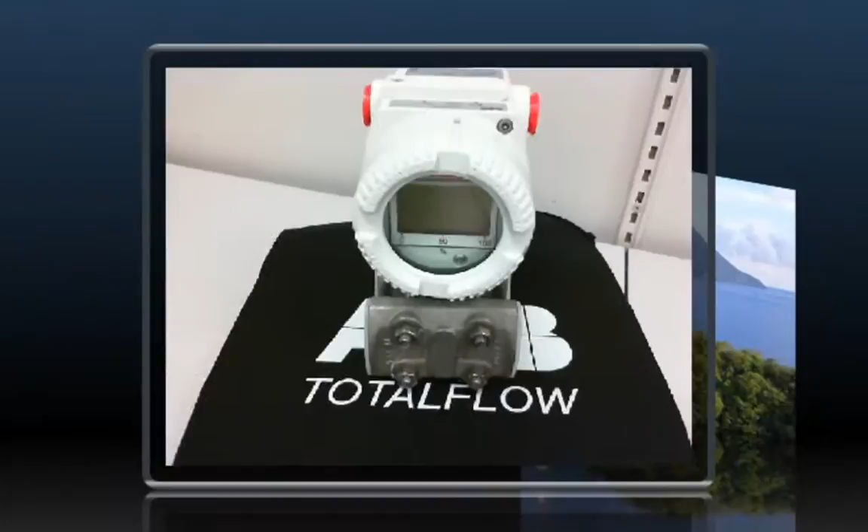The XMV multivariable transmitter is a 2-wire RS-485 Modbus device. It requires less than 12 milliamps to operate and can be powered by a Totalflow G3 and G4 series with 12 volts. The XMV works by measuring static pressure, differential pressure, and process temperature, and then communicating these readings via RS-485 bus to the Totalflow X series device.

Let's take a look at the hardware on the ABB multivariable. On the front you can see we have a display with a cover. We have 2 ports on the side, which we can put our RTD and our wiring. Around the back we have our terminations. Let's unscrew this cover. RTD here and here. Our power and RS-485 bus there.

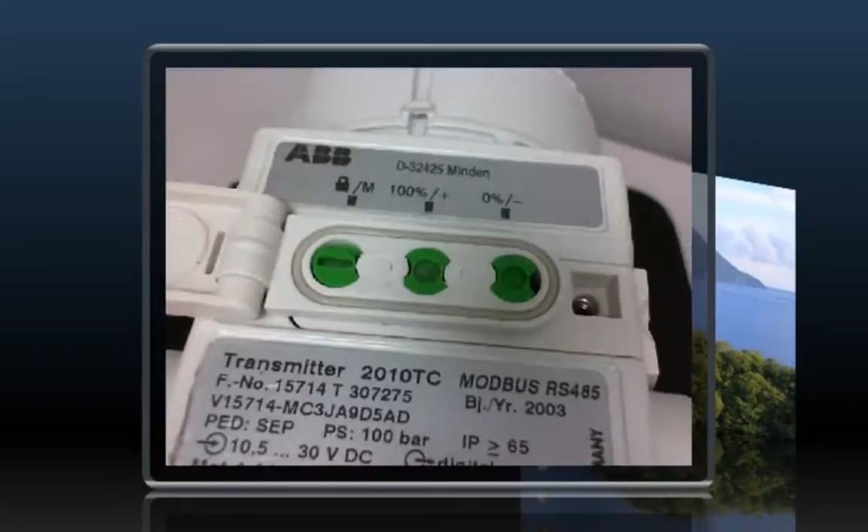On the top of the unit we have our push buttons in which we can set up the unit. As you can see, we have plus and minus, backwards and forwards. We operate the programming just by pressing down, up and down with the screwdriver.

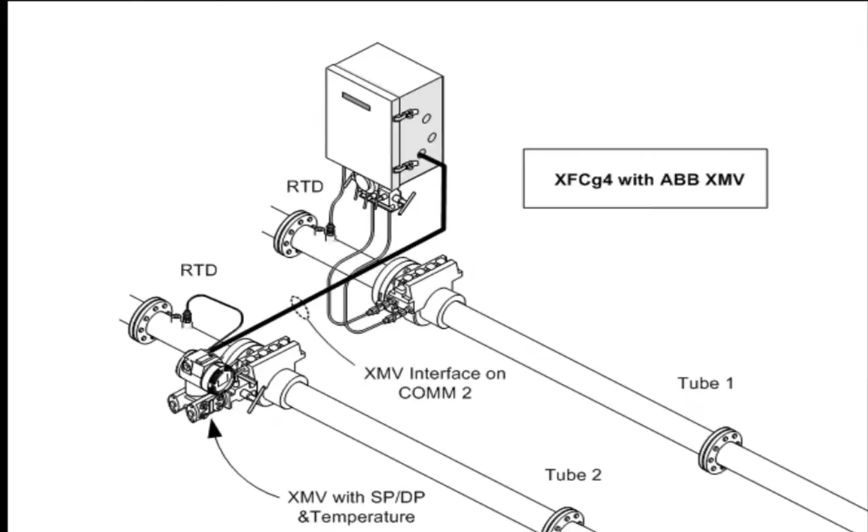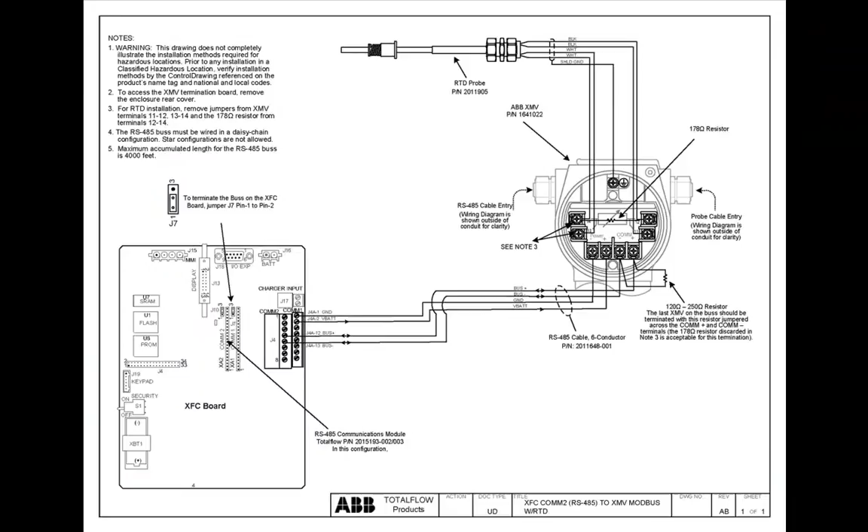Now let's take a look at the wiring between the XMV and the XFC board. As you can see from the wiring diagram, first we'll start with the XFC side. As you can see from the diagram, we have bus plus and minus and power connections. Also notice that we need a COM2 module placed into the COM2 module slot on the board of the XFC.

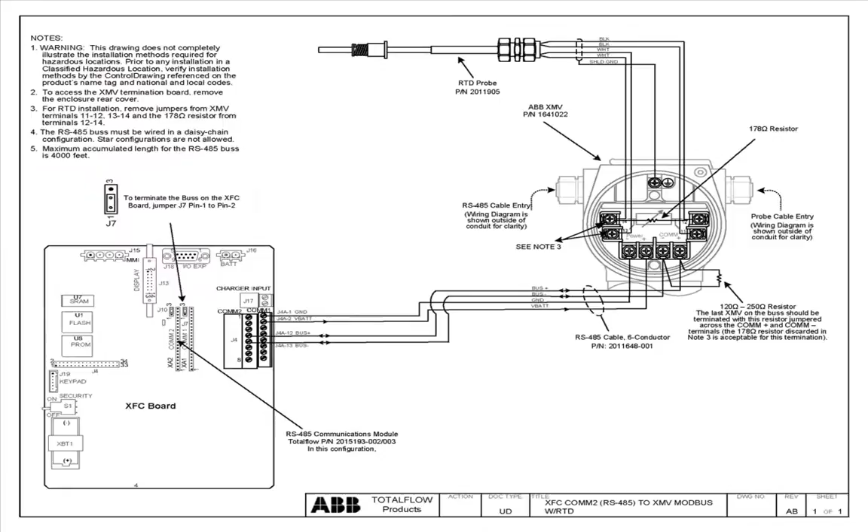Now let's move over to the XMV itself, and notice we have the same connections, bus plus and bus minus, power plus and minus. Also notice from the text that if this is the last XMV in the series of XMVs, if there are multiples, we need to apply this 120 ohm resistor to the last XMV, as the note states.

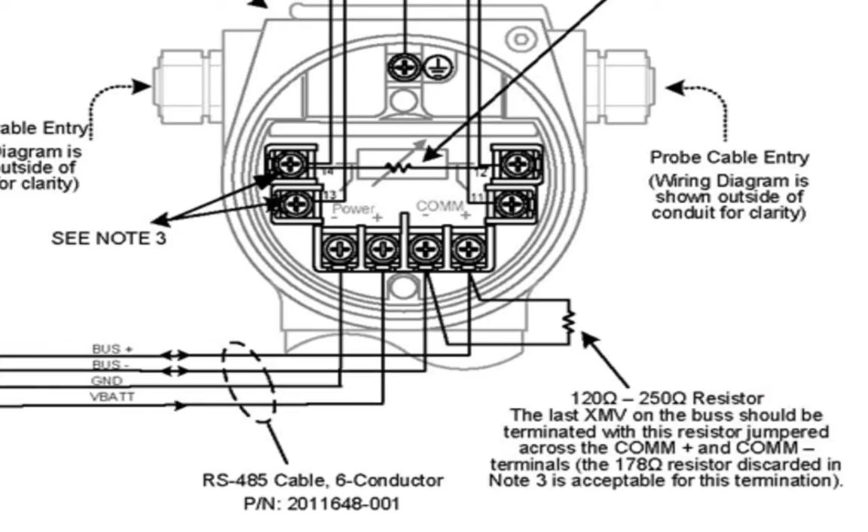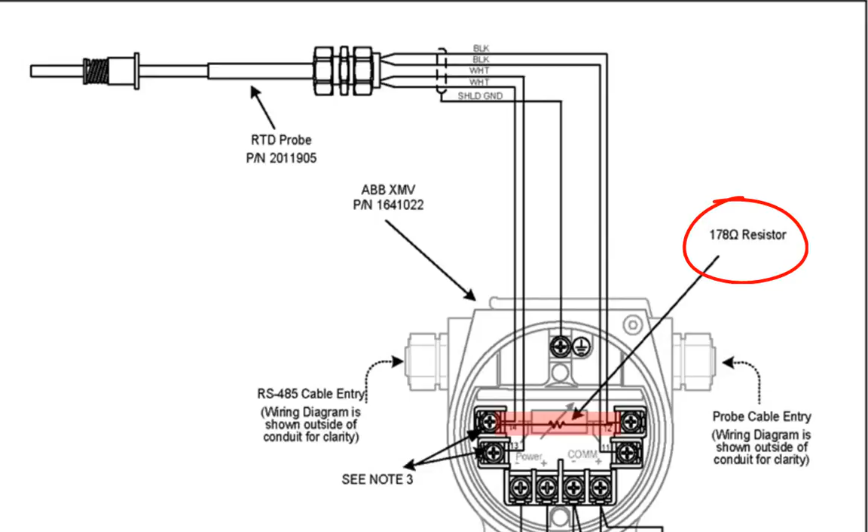Finally, let's take a look at the RTD connections for the XMV. As you can see from our diagram, the black wires go on the right together and the white wires from the RTD go on the left. Also note that we need to remove the 178 ohm resistor that's on the unit when we get it from the factory, and also there's a jumper wire on each side. We need to take those off. This concludes our wiring.

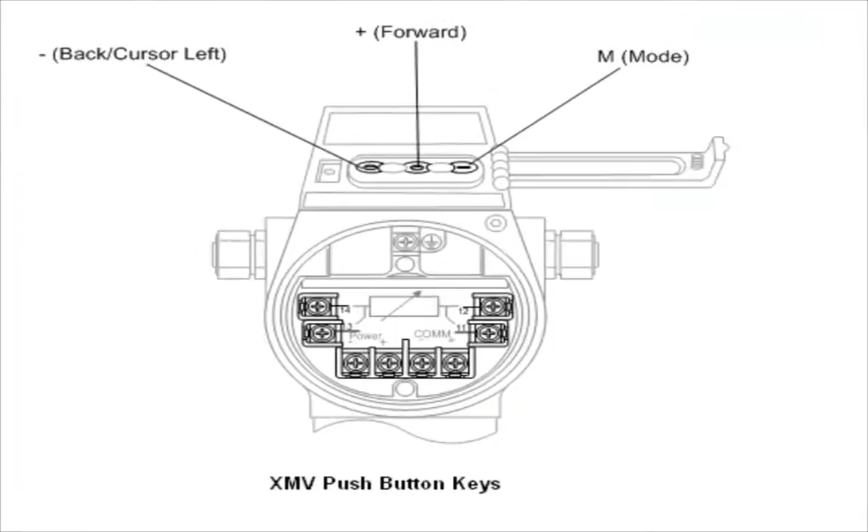Now let's look into the actual setup of the XMV using our push buttons. If we look at the top of the unit, we can see there's 3 buttons on top. One is for the back cursor, one is to go forward, and one is the mode.

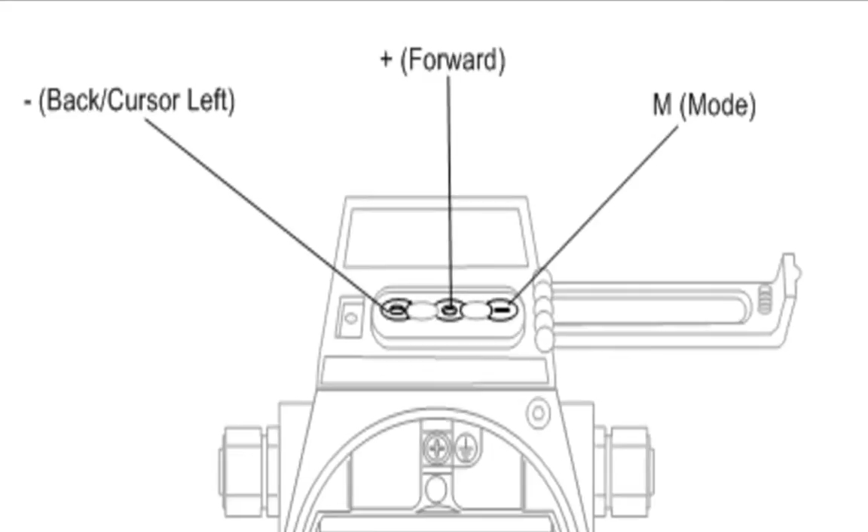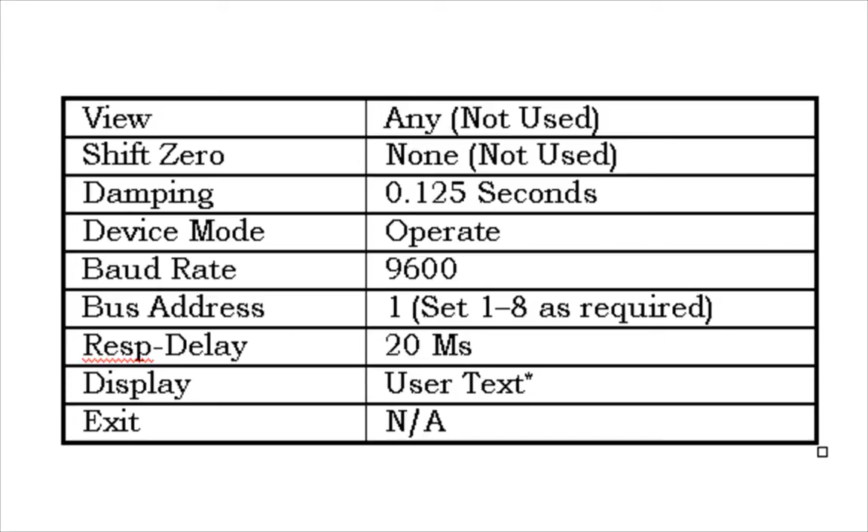The table you see here represents the setup parameters within the XMV as set with the factory. This should be fine for the scenario we are looking at with a single XMV. Notice the bus address is set to 1, and we need to pay particular interest to that to make sure that is correct.

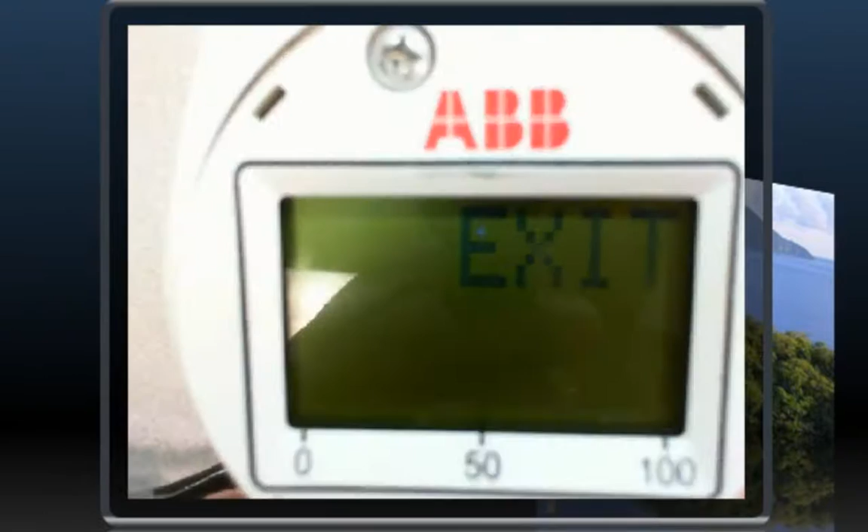To set up the XMV, let's take a look at the push buttons on the top of the unit. What we want to do first is we notice it's scrolling right now. We want to get it into the exit mode. We do that by selecting this top right key, pressing it 1 time, and we go to exit.

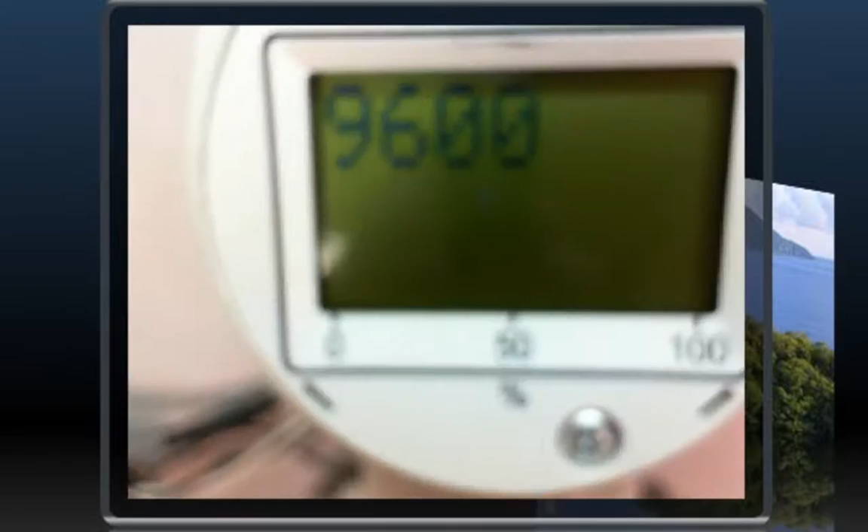Now to scroll to the other parameters, we move over 1 to the center position, and we simply toggle it till we get to the proper parameter that we want. In this case, we're going to go to baud rate. Now once in baud rate, we go back to the right, we enter into that one. We can see that it's set on 9600.

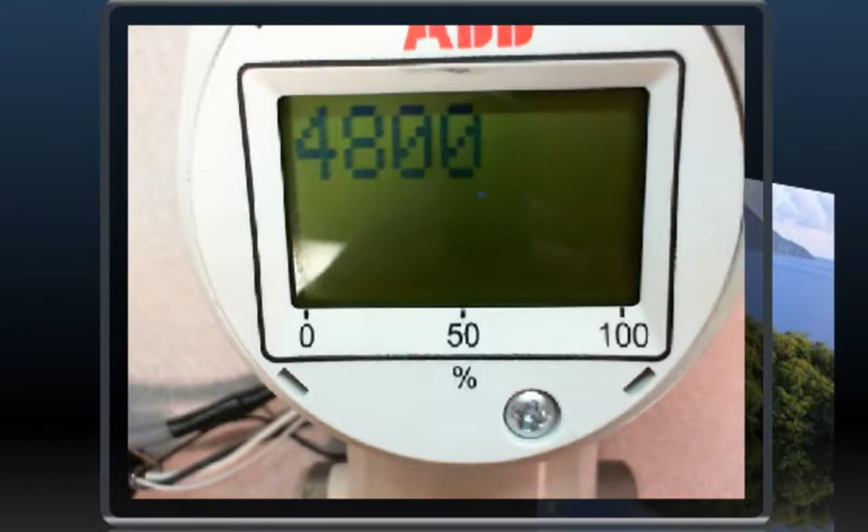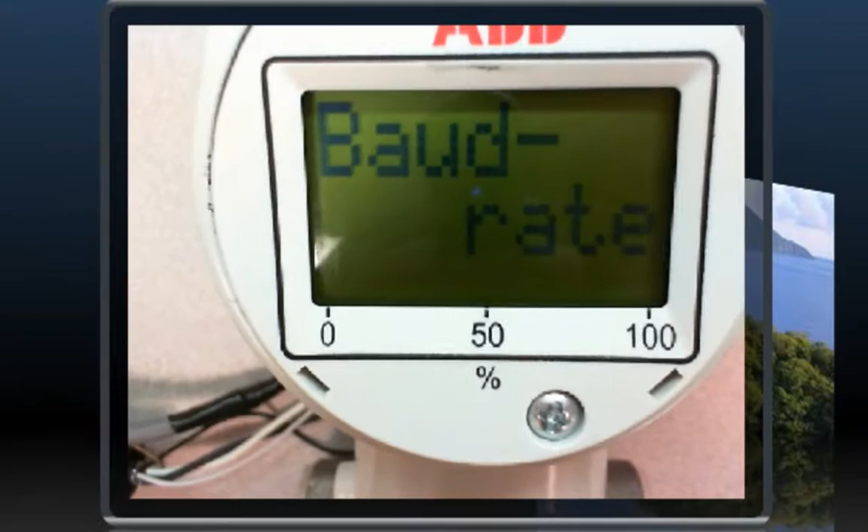Suppose we wanted to scroll to another parameter, we would move back to the center. You can see it's scrolling through the different baud rates. Let's leave it on 9600. Go back to the right, say OK. Go back to baud rate. Now let's go to the center. Scroll back to our exit. Push the right key. And now we should be scrolling normally on the display.

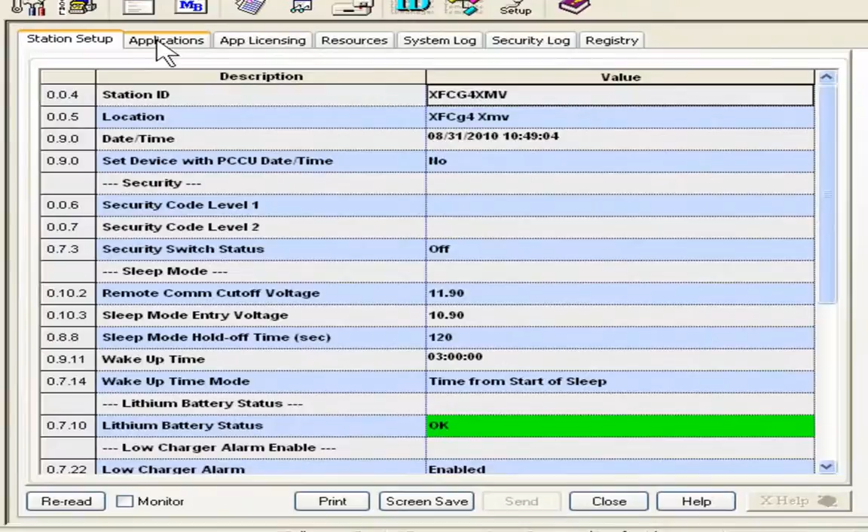Now that the XMV is set up properly, let's go into the XFC and set it up with PCCU. First, we go ahead and normally connect. Going to our top menu, we're going to need to turn on an application for another measurement tube and also the XMV application.

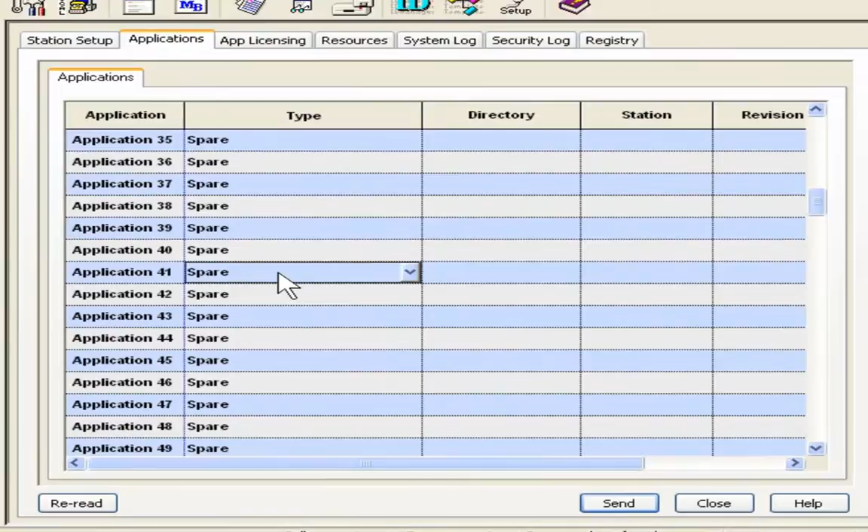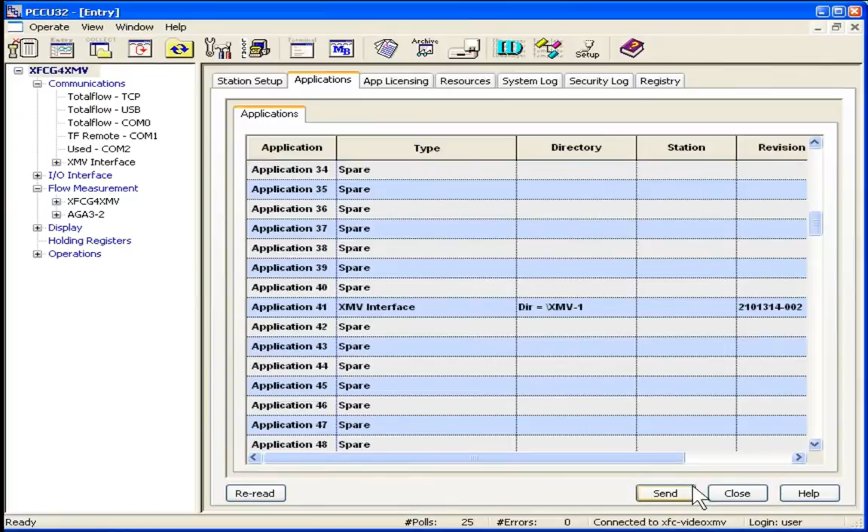Let's set up an AGA3 tube under 12. And let's scroll down to 41. Put in our XMV application. Let's send that. As we can see, we have our second tube at 12 and our XMV interface now at 41. If we look over now in the tree, we can see that we have AGA 3-2 and we also have an XMV interface.

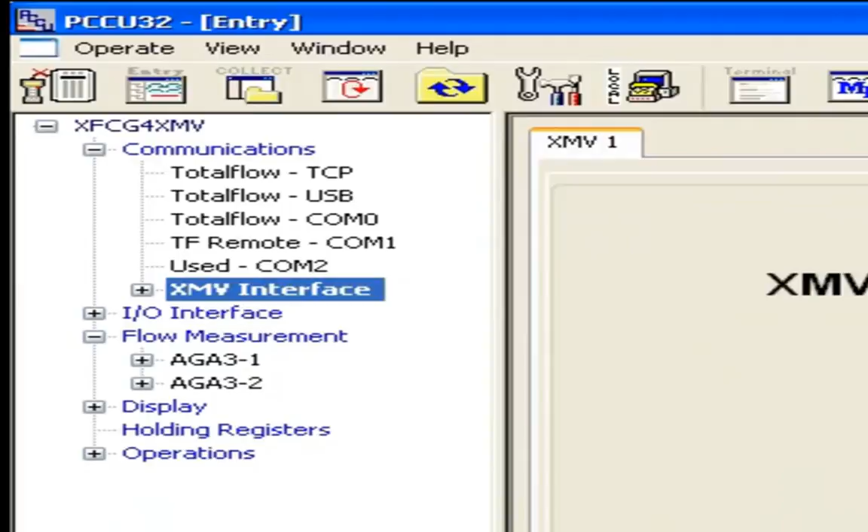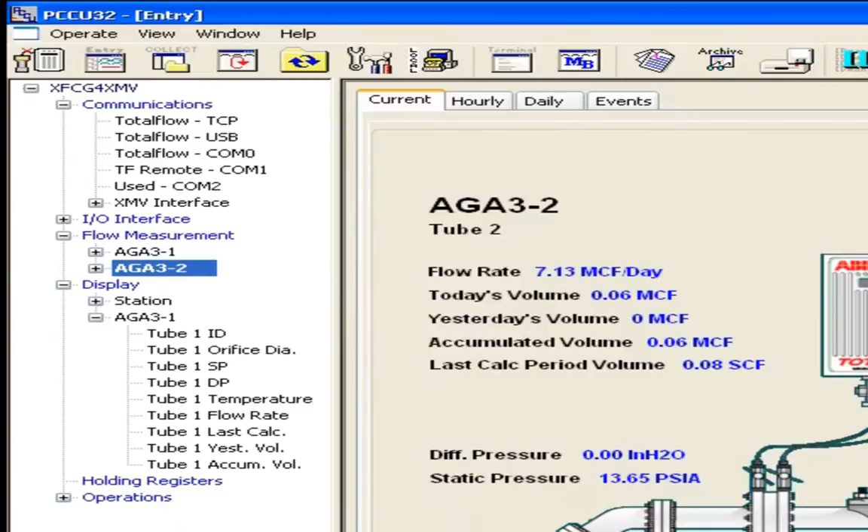Since we now have an additional tube, AGA 3 number 2, we need to set up displays for this additional tube that we just set up. Notice we just have display for AGA 3-1. To set up an additional display, let's go into Save and Restore Utility. Let's look at the files that are in display currently. Notice we have the original one, AGA 3-1. Let's double click on that.

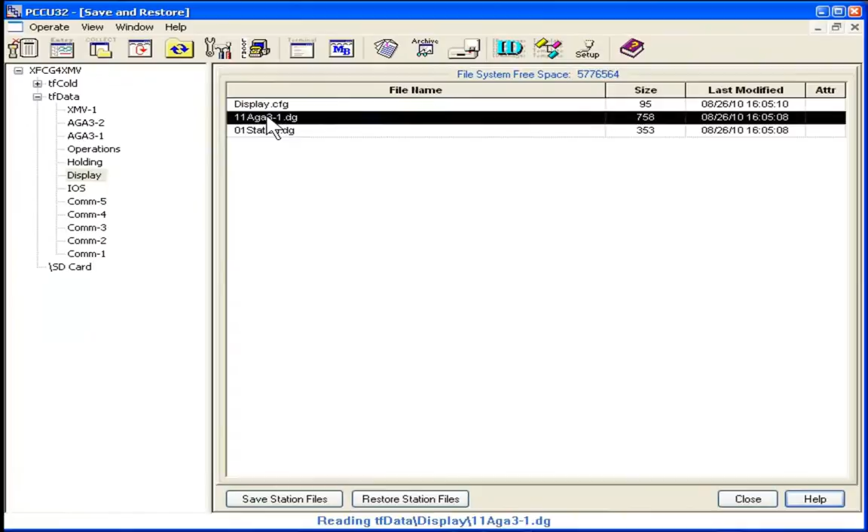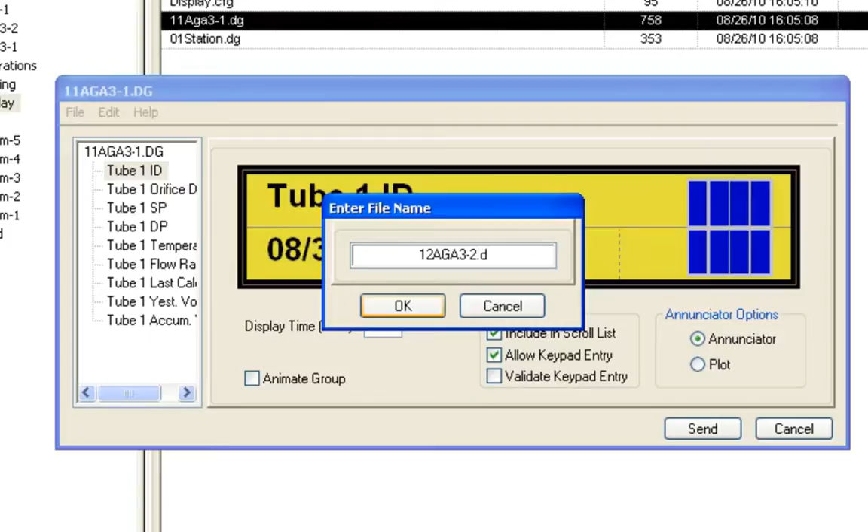We're going to go to File, Send As. What we're going to do is call this... we're going to say OK. Now we're going to go in and edit this file to make it tube number 2. First we go to the group description to make sure we change that so that makes sense. AGA 3-2. Say OK.

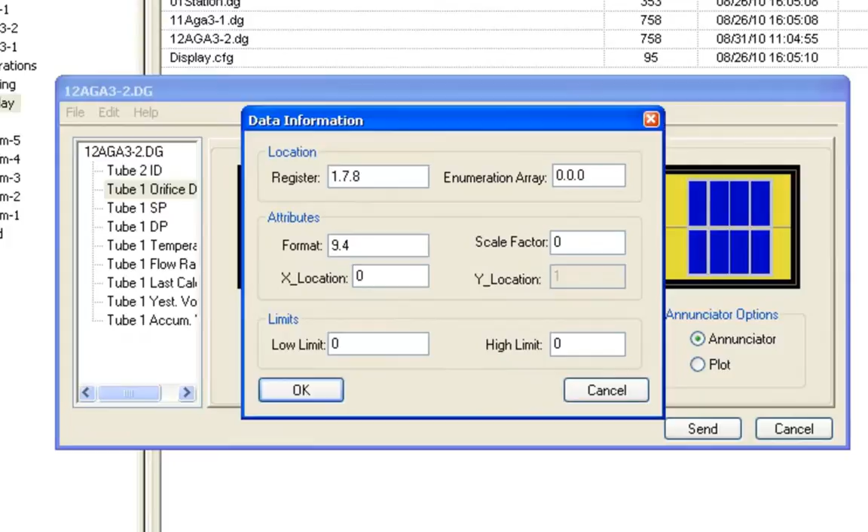Let's go in and change this to tube 2. Let's click on this area here. Move this up 1 to account for our second tube. Say OK. Go down to orifice, same thing, we do tube 2. This is going to be at the 12 application. Say OK. So we would do this all the way down to the bottom of the list, and then when we're through we would say send. Now we can see we have it in our list. Now let's close this.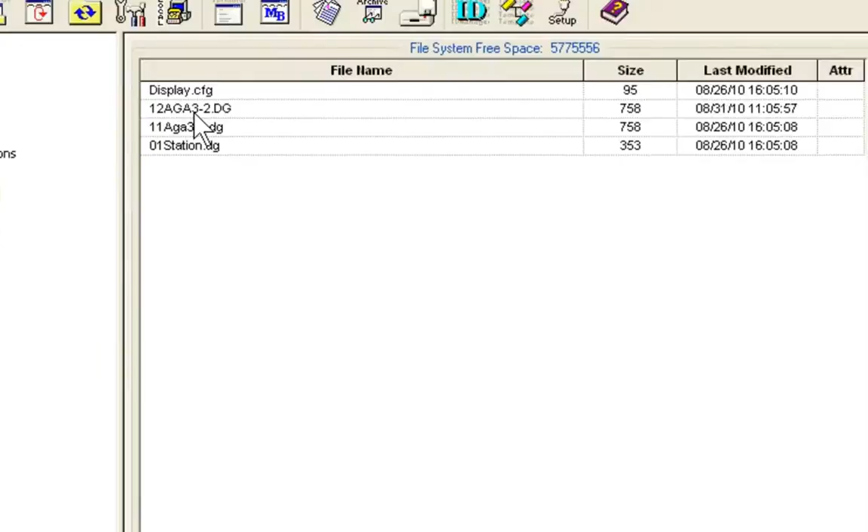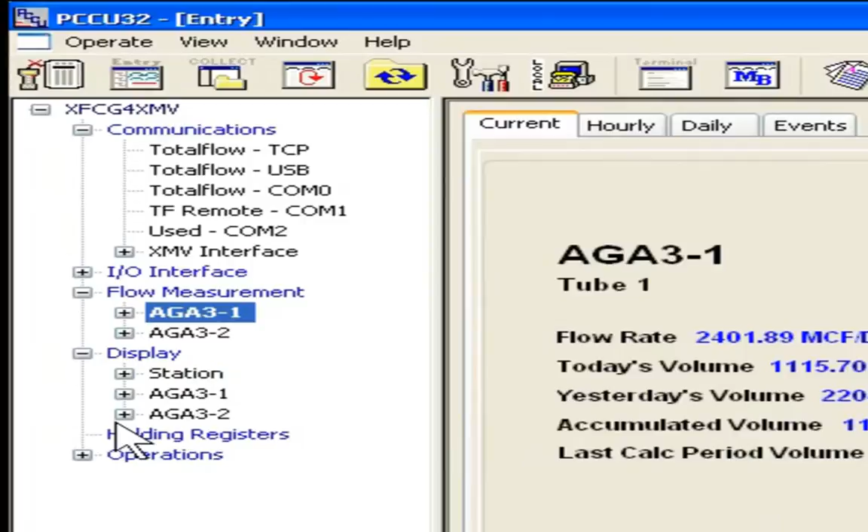Before these changes will take effect, we need to warm boot the XFC. So let's do that by just simply taking the power on and off quickly. Once we've done the warm boot, let's check and make sure that our displays are correct. Let's go into Display, go down to AGA 3-2, and we can see we have all our displays there, similar to the first tube. So this all should be correct now.

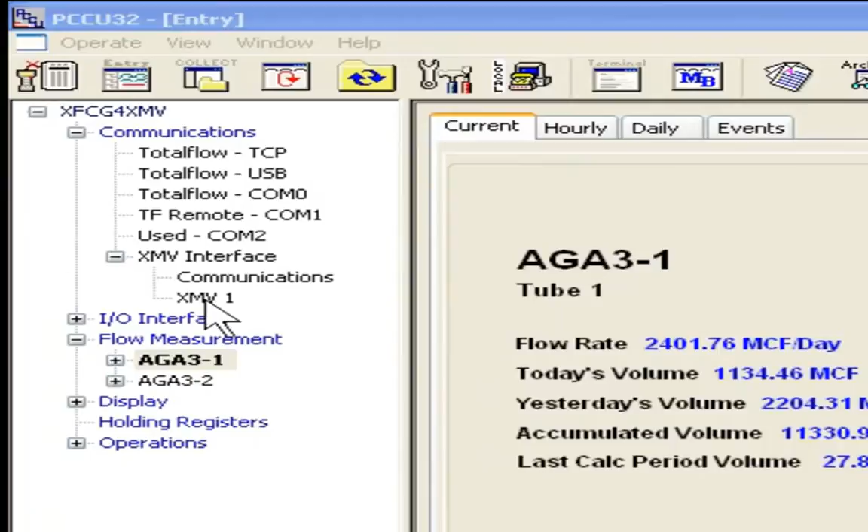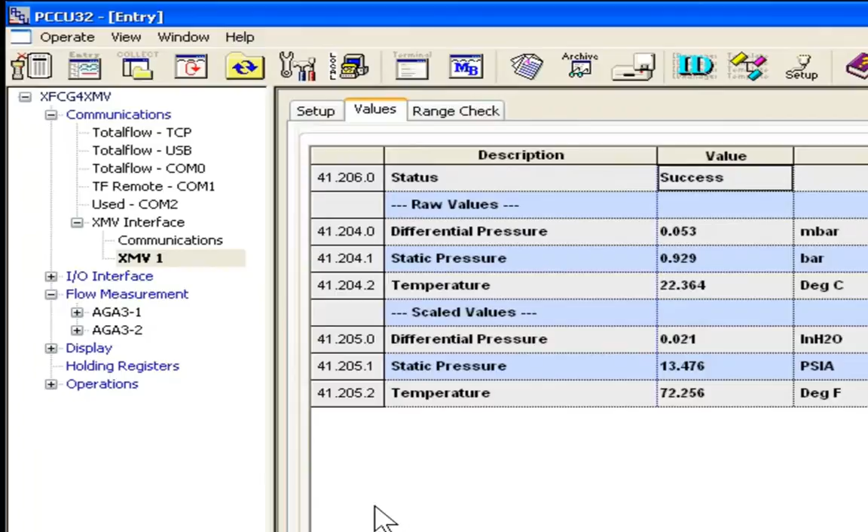Let's verify quickly that everything is correct now in our setup for the XMV. Let's go into Entry. Let's look underneath the XMV interface. Let's go into our XMV1, which is our XMV app. Let's go to the Values tab. Notice we are getting a success here, which means our communication between the XMV and the XFC is working fine. Also notice here's our live values we're getting from the XMV: differential pressure, static pressure, and temperature. We can do a reread to watch these values update.

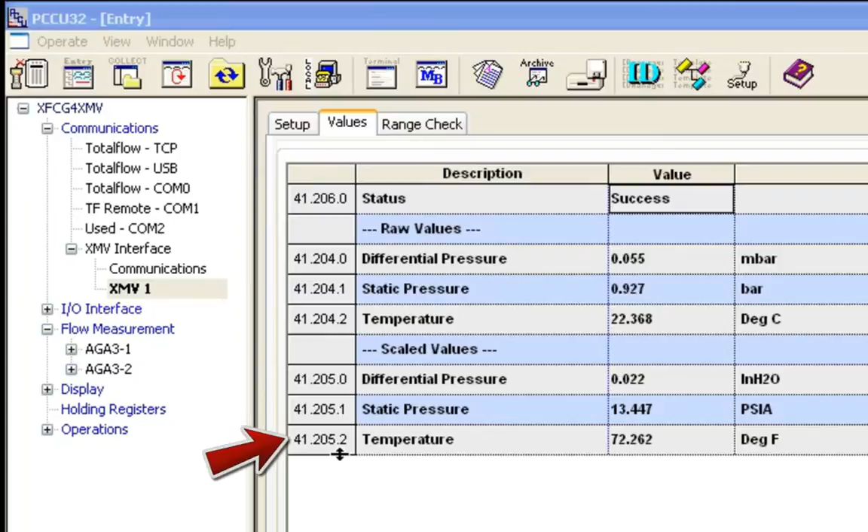Also notice the app array registers of differential pressure, static pressure, and temperature. These need to be the same in our AGA 3-2 measurement tube. 41205.0 is DP, .1 is static, and .2 is temperature. So let's now go to our AGA 3-2 tube, go to the Advanced tab. Now let's make sure that these are correct. DP is at 0, static pressure is .1, and .2 was at temperature. So this all seems to be fine.

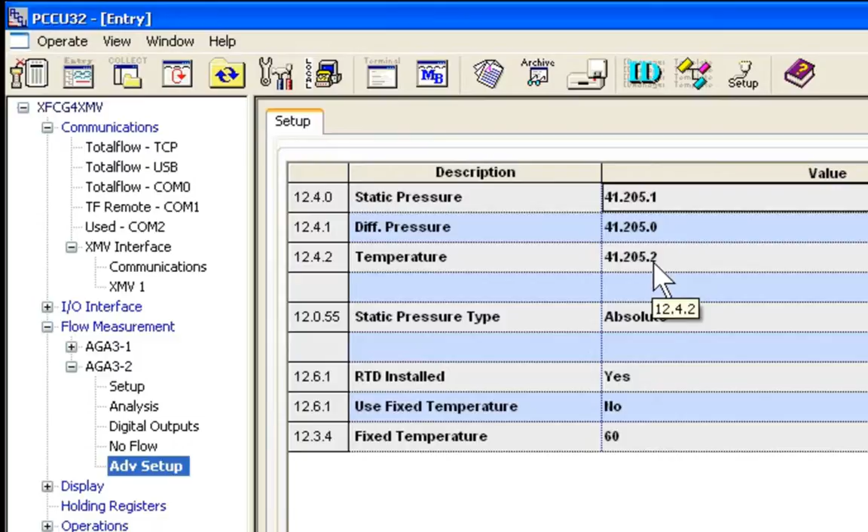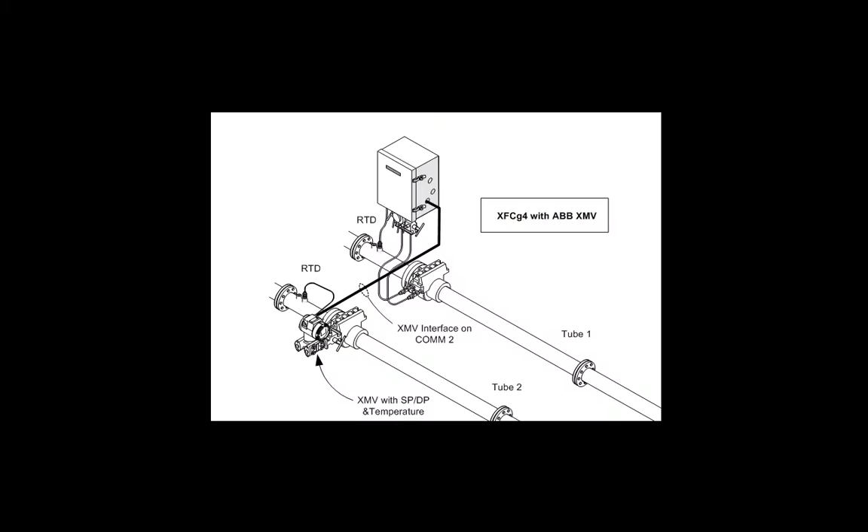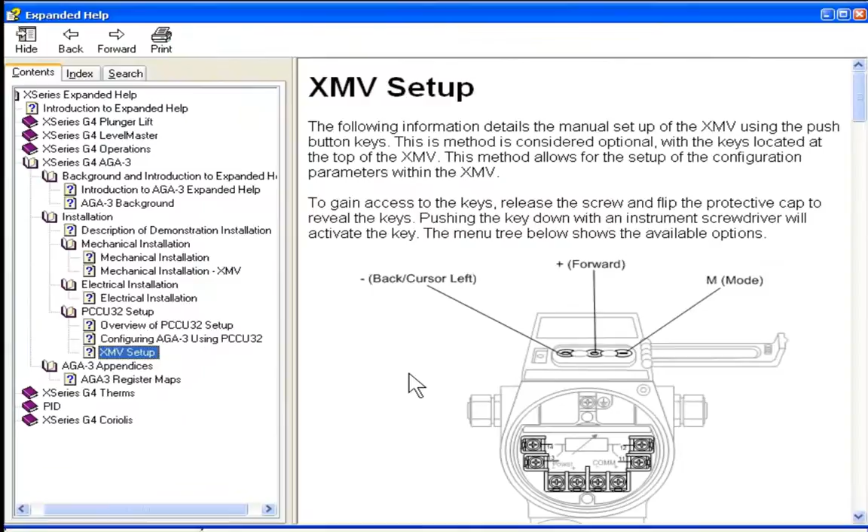This concludes the video for the ABB XMV. As we've seen in the video, you can connect quite easily to the G4 device with the standard factory default settings for the XFC as well as the XMV. If you need additional information concerning the ABB XMV, don't hesitate to go to the help files, where you can find lots of help for mechanical installations as well as setup for the XMV. For more in-depth information, you can consult our ABB multivariable manual. You can get this on the website or through one of our customer service representatives.